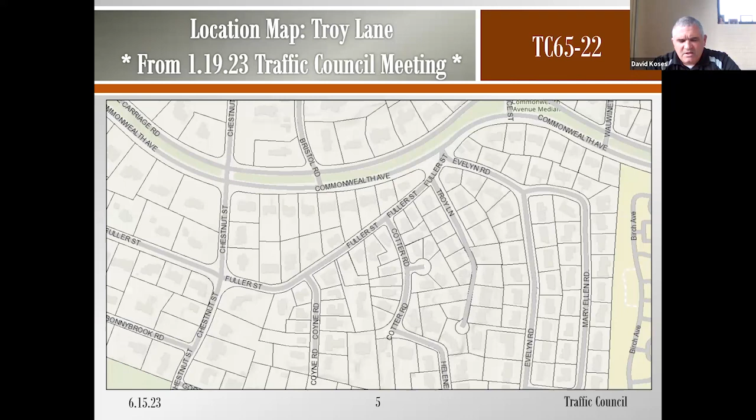So we'll begin with a quick presentation, and then we can open it up for public comment. This item we actually heard earlier this year at our January 19th meeting. This is Troy Lane, it's a dead-end street. I have some slides that we showed back at the January meeting that I'll go through, and then a few additional slides at the end.

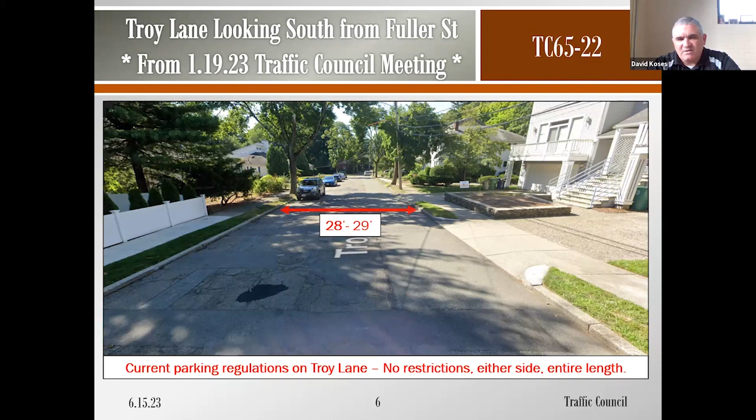Here's a view of Troy Lane looking south from Fuller Street. It's pretty wide at the beginning, about 28 or 29 feet wide, but then it gets very quickly quite narrow in the middle of the street, only 15 or 16 feet wide. Here's a view of a car parked, a small car, in the narrow section of Troy Lane. Even without snow, even a small car parked there leaves only 8 or 9 feet. Not enough room for certainly an emergency vehicle to get through, or trash or recycling.

So we heard this item in January. There were no restrictions on either side of the street at that point. The recommendation in January was to hold this item as a trial. It's been held since January. We did a trial to restrict parking along the narrow section of the street and around the cul-de-sac. That was the Traffic Council vote.

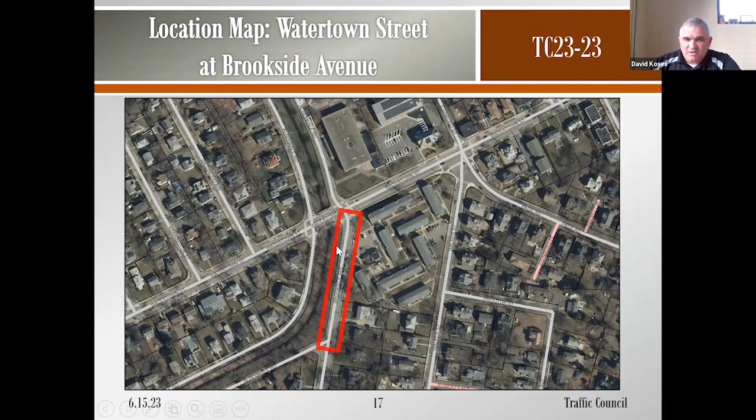So this is part of a larger design we've been working on for quite some time, all the way from Washington Street up Albemarle, beyond Crafts Street. But all we're really talking about right now is this one intersection.

The idea is that you could ride your bicycle from Washington Street up Albemarle Road in this marked bike lane, come to the light, wait for it to turn green, then continue across what we're calling these cross bikes—we have crosswalks here. This cross bike lets bicyclists continue northbound up to Crafts Street and beyond. In the southbound direction, we'd also have a bike lane coming down, reaching the signal, and if you'd like to continue onto Washington Street, you'd have the choice to continue through this cross bike and then a bike lane, continuing down in this contraflow bike lane to Washington Street. That's the concept.

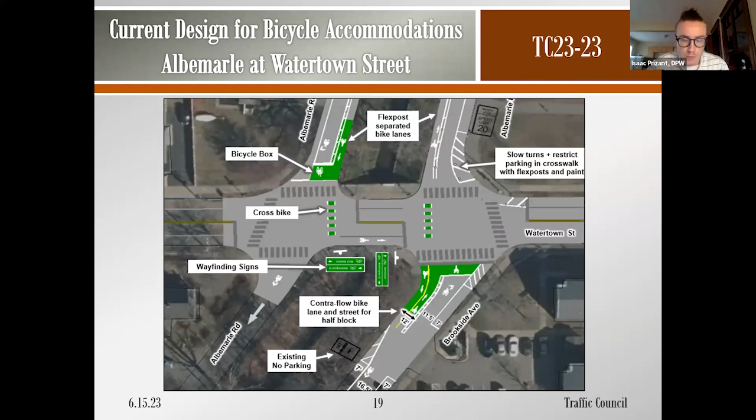All right, very good. Thank you. And we can move on to our next item.

Okay, so our next item is TC 2123. David Koses, Traffic Council Chair, on behalf of neighborhood residents, requesting to discuss and potentially restrict parking at all times on one side of Johnson Place to help improve safety.

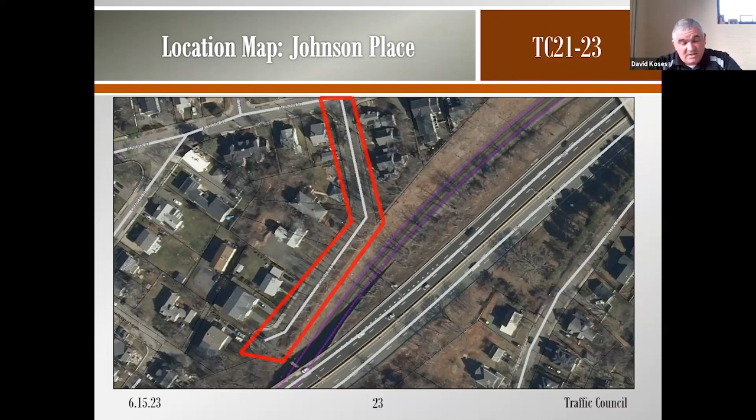So here is the location of Johnson Place. It is a dead-end street off of Auburn Street. It's part of the overall Auburndale Village Parking District. Here is the location of Johnson Place. You see that it's shown in red on both sides, which means that when you go to the street, you'll see that the posted signage is a 2-hour limit, Monday to Friday, 9 a.m. to 5 p.m., except by Auburndale permit.

So the residents who live on Johnson Place are the ones who are able to get a permit if they wish to, and visitor passes to be able to park for more than 2 hours during that restricted time. Otherwise, vehicles could only park for 2 hours.

So here's a view of the street. It's 23 feet wide. Here's another view. This is looking from Auburn Street to the south. Notice that most of the east side has no sidewalk. So this did come to us from a resident of the street who was concerned about parking on both sides because of the narrowness of the street, making sure that emergency vehicles could get through. And so that is our recommendation.

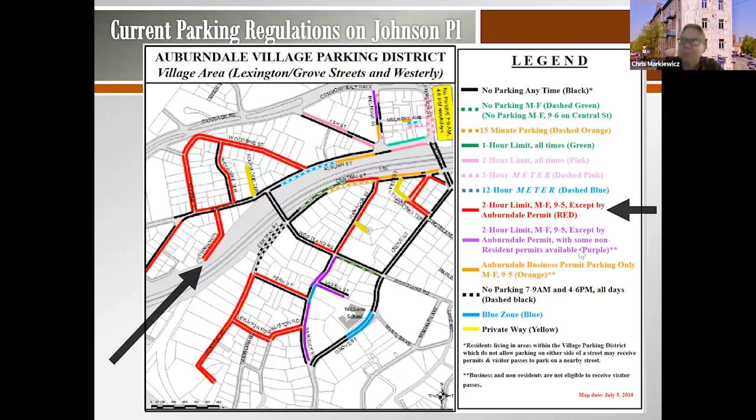Yeah, no, I get that. But I was hoping you would say what you did. So I think that's good. That's really... but I wanted Ms. Swanson to understand that that's really kind of the extent of how you can manage this type of thing. It's unfortunate though that you do get construction sometimes, and some contractors just don't follow the rules, and you got to kind of keep an eye out for them.

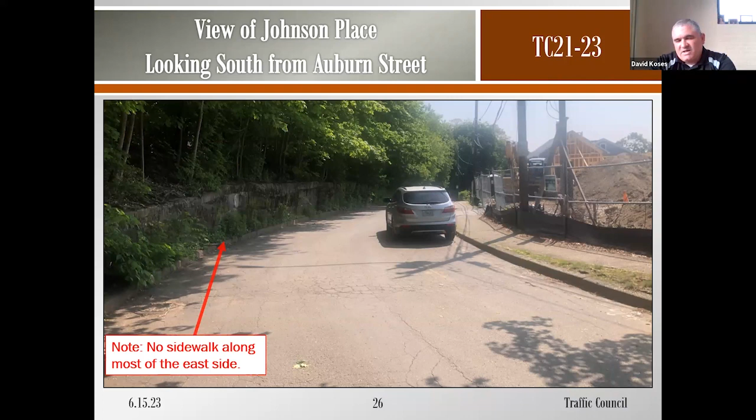Okay, well, I guess I very rarely see any parking on the east side, it's always the west side. And the main concern is the narrow entrance to Johnson Place from Auburn Street, which is where I live. So if no parking from the corner of Johnson Street, probably 300 feet or 100 feet back, is probably the best on the west side, because people typically don't park that far back. I'm not, I can't say that definitively because I don't always monitor it, but it seems like it's always from the corner to the end of my driveway is where people park.

So the west side is the best side to have that no parking. Actually, it isn't, because the road narrows towards the end where I live. And if you have parking on the east side, I can't leave my driveway, and neither can my neighbors, because they'll block us in. The street's too narrow at that point. That's why no one parks on that side now. And if you restrict them from parking on the west side, they will park on the east side, and I'll be blocked in, and so will my two neighbors on either side of me, because the street narrows significantly as it turns the corner. Okay, do you have anyone parking?

Do you have anyone parking in front of your house, please, now? Okay, excuse me, let's just speak to traffic council, we're not having a private conversation. Mr. King, would you like to make another comment?

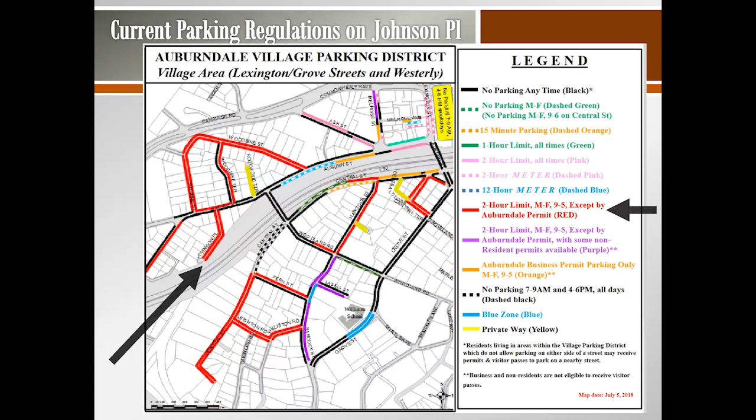So I think we just need to be a little bit careful that we don't approve some permanent regulations and permanent inconvenience for some activity that is really temporary in nature. Something to think about. We could always change something later, but maybe we should recognize that there's a lot of construction happening on Johnson Place and in so many places around the city. But then it'll end and move to another street.

Other comments? Okay, so traffic council members, what do you guys think? We have an option here that we could vote on, which would restrict parking on the east side and leave it the same on the west side. We could do a trial, we could just vote this and see if the residents are strongly enough opposed that they decide to appeal this decision. Councilor Markiewicz.

Thanks, Mr. Koses. Well, having listened to the testimony from all the folks on Johnson Place, my question is, kind of back to the engineer, I'm a little confused. Are we actually solving the problem with this restriction now, or do we need to modify this to some other form of restriction? The 50-foot or the 100-foot thing which was mentioned made a lot of sense to me. Or do we need the east side prohibition now? So I guess that's my question back. I want to make sure we're actually solving what we think now, having had this conversation for the last 10, 15 minutes.

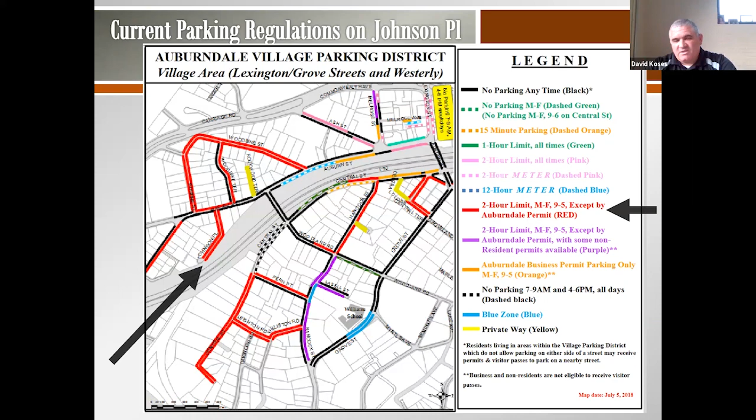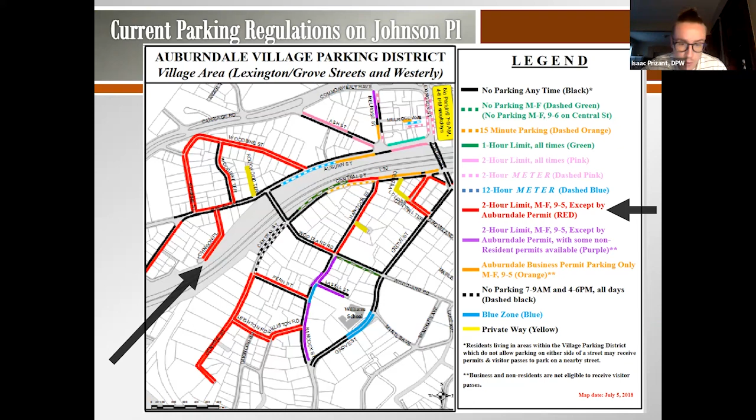If we vote to restrict parking on one side, what do you think about one of our traffic engineers going to take a look and determining based on safety whether an additional parking restriction is required near the intersection? I don't have an issue with taking an iterative approach, but restricting the first 50 feet on the west side is very reasonable, and we can do that now, which saves me the trouble of going through an administrative parking restriction process. Not that it's difficult, but it's a process that can be avoided if we do it now.

Okay, so is that a suggestion you're making to amend this slide? Yes, I'd like to. We're very approachable and reachable, so Mr. King, if we get to a point where that's installed and you still have recurring issues, then perhaps we need to return to look at a 100-foot restriction. But I'm fine with taking that approach step by step.

Okay, so is someone trying to speak? I think he just said thank you. Okay, Mitch.

I have a couple questions. One is, if we do a trial, is that appealable? No, you cannot appeal a trial because it's not actually voting to approve something.

Okay, so I guess my inclination is to go for a permanent solution with Isaac's amendment and see if the 50-foot works. If not, particularly with the neighbor at the corner, that could be an administrative matter at that point. I think the construction there may be more intense now, but there's certainly a lot of construction in the area, and other parking restrictions probably lead people to this street in any case. So I think doing a permanent relief would probably be the best thing.

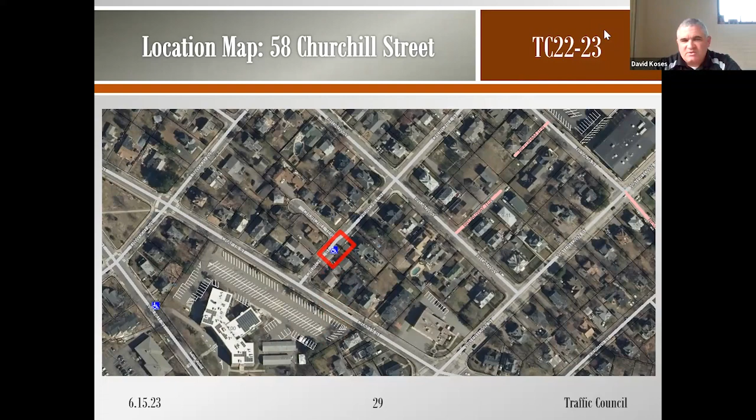This is David Koses, Traffic Council Chair, requesting to remove the accessible parking space at 58 Churchill Street, as staff understands that this space is no longer being used. Okay, so this is the location of the accessible parking space at 58 Churchill Street. It's been posted here, you can see it on this slide right there. This is the accessible space.

And so I did go out and talk to neighborhood residents to find out if this space is still being used. I found out that it is not being used anymore. And so that's what we do at Traffic Council. We approve accessible spaces when someone in the neighborhood has a valid placard and uses that space to get in and out of their home. And then when it's no longer being used, we need to vote through this process to remove the space officially. So that is our recommendation, to remove that accessible space.

We would be waiting for a 20-day appeals process. If there are no appeals, then the sign would be removed after July 5th. So that is the whole presentation for this item. And I'm going to open it up for anyone who has a comment to raise their hand. And I don't see anyone raising their hand.

And I do see we're joined by our ADA coordinator, Jeannie Fairley. And we are also joined by Councilor Oliver. Jeannie's got her hand up now.

Okay, Jeannie. I just wanted to thank you, David, and Transportation for doing their due diligence, because it's important to follow up on any request of an accessible parking space not needed anymore. So thank you very much. Thank you, Jeannie.

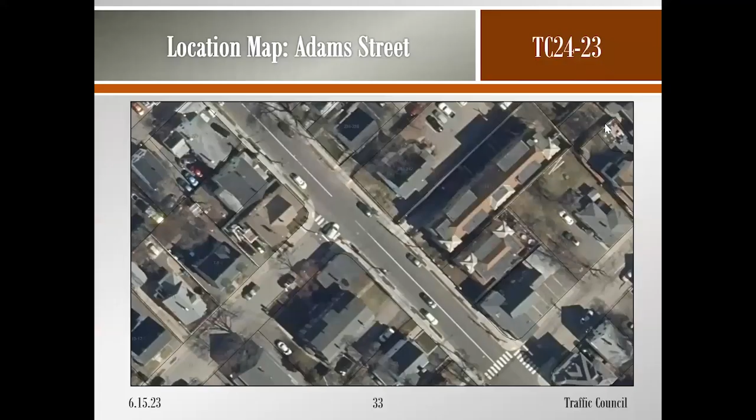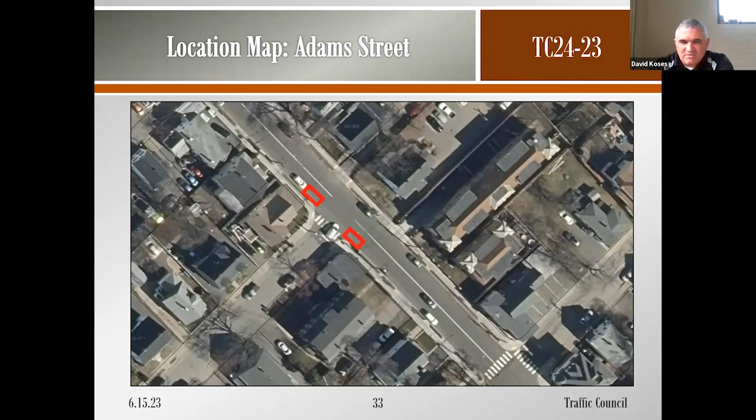Okay, Councilor Greenberg, thank you. You basically did my whole presentation for me. Oh, thanks. Okay, so I'll run through this quickly. This is the location that we're talking about. This is Clinton Street. This is Adams Street. The two rectangles are the two areas we'll be talking about. Don't forget, we had several meetings about the parking regulations on Adams Street not too long ago. We changed all the regulations up and down Adams Street. So this would be a small change. This is the view of Di Pasquale that Councilor Greenberg was talking about at 241 Adams Street.

And you can hopefully see the cursor. This is the sign that's been posted for a while now that says no parking here to corner. So this whole stretch from Clinton Street, the frontage of their store is no parking. And the request is to put a new post in on this side of the trash and recycling, where this basket is right here, and put the no parking here to corner sign right there. So to create one new parking space right here.

Then on the other side, this is the north side. There's currently no restriction. People could park all along here. We do agree that it's a little bit more difficult when you're coming out Clinton Street, if there's a car parked right there on this corner, to be able to see around the southbound vehicles, right?

So we did look at this. We had our traffic engineer come and take a look with me. And so we have some options of either denying the request or approving the request. If we do decide to approve the request, we would be adding a space on the south side of the intersection in front of De Pasquale's, and restricting parking on the north side of the intersection, basically using this utility pole so that there would be no parking along the driveway and along the frontage, opening up the sight lines for turning vehicles.

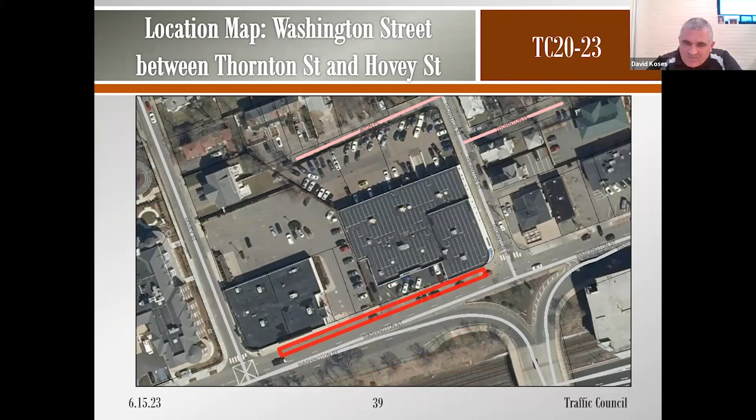Okay, so this is the location that we're talking about. It's just this one block of Washington Street between Thornton Street and Hovey Street. So here's what it looks like. This is Honda Village, you can see this sign right here, a close-up of that sign, a 1-hour limit. And then a little further down is Walgreens with the same sign, a 1-hour limit.

It just seems, especially for Honda Village, though Walgreens also has a large parking lot, that our division, which also handles parking ticket appeals and hearings from across the city, sometimes sees tickets issued here for people who are at Honda Village, maybe looking at a new car. And 1 hour just doesn't seem long enough, so we thought it might be more convenient for customers to park for 2 hours.

So that is the recommendation: just changing these signs from a 1-hour limit during these hours to a 2-hour limit for this one block. And this would be the language that we would be voting on to make that change.

Okay, so that's the presentation for this item. Any comments?

Okay, then I will make a motion to approve the language of TPR 881 to reflect the language shown on this slide, to make that change from a 1-hour limit to a 2-hour limit. Any last comments?

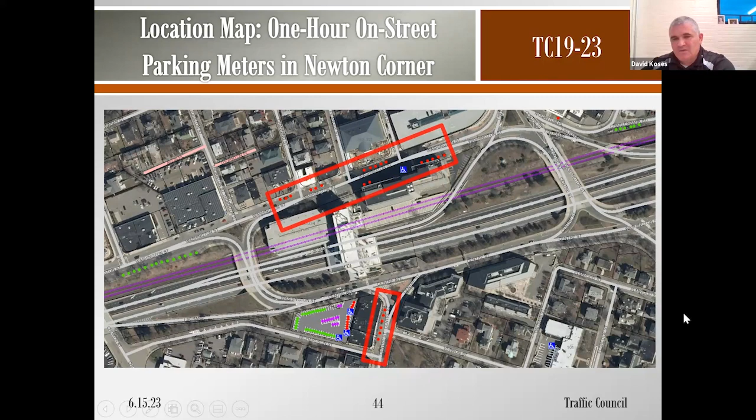So again, this is the language—I will make the motion. This is to approve the language of TPR 882 for TC19-23 to change these meters from 1 hour to 2 hour.

And Danielle, can you call the roll, please? Mr. Fishman, aye. Councilor Markiewicz, aye. Captain Doucette, aye. Mr. Koses, aye. And Mr. Prezant, aye. Okay, that's approved 5-0, TPR 882.

Okay, good. So then after July 5th, I'll work with our parking manager to make these changes to the meters, as long as there's no appeal.

And then our last item of the night is TC18-23, Devontae Thornton, Parking Manager, and David Koses, Traffic Council Chair, requesting to change the 30-minute space and the 1-hour meter on Charlesbank Road into 2 long-term metered parking spaces.

Okay, so this is this area you're coming off of, I guess, Nonantum Road. You're coming off Charlesbank Road, not going onto St. James, but continuing all the way around. You're coming in this way, and this is where you're merging with the Pike traffic coming off the Pike right there. This is the Pike westbound exit, merging with Charlesbank Road right here in Newton Corner.

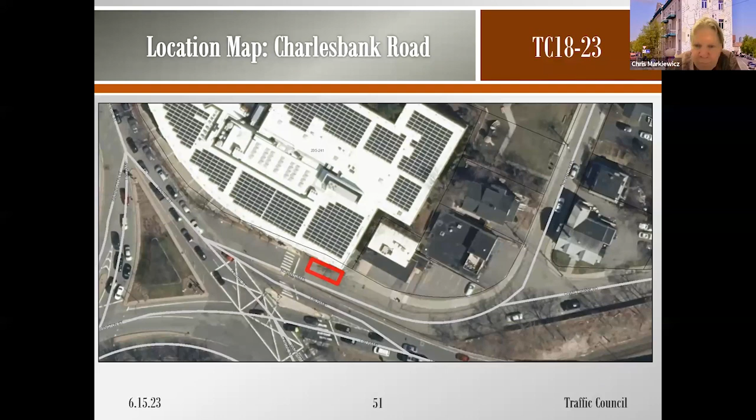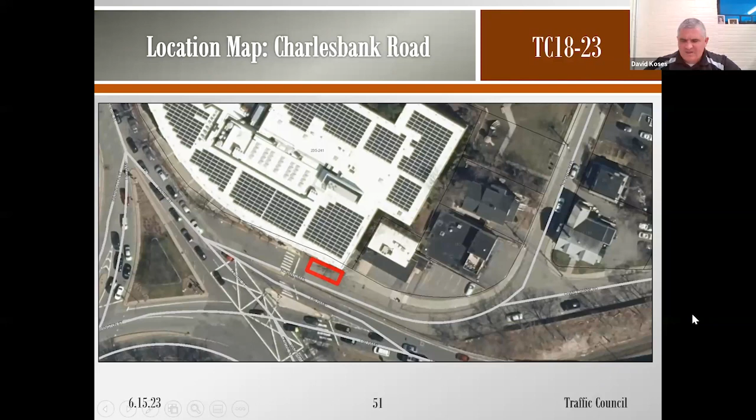Any other comments? Seeing none, I will make the motion to approve the language of TPR 883 - sorry, I was on the wrong page - TPR 883 for TC18-23, to approve the language as shown on slides 52, 53, and 54 of the presentation.

Any last comments? Okay, Danielle, can you call the roll, please? Mr. Fishman, Aye. Councilor Markiewicz, Aye. Captain Doucette, Aye. Mr. Prezant, Aye. Mr. Koses, Aye. Okay, that's approved 5-0, TPR 883.